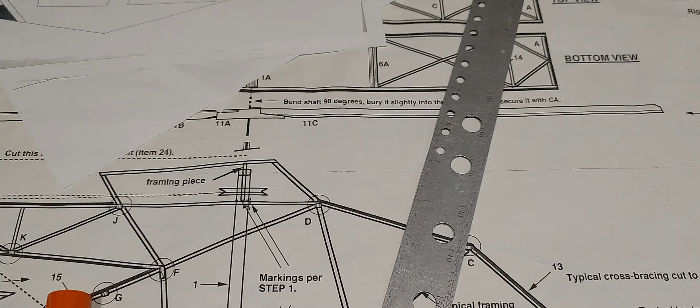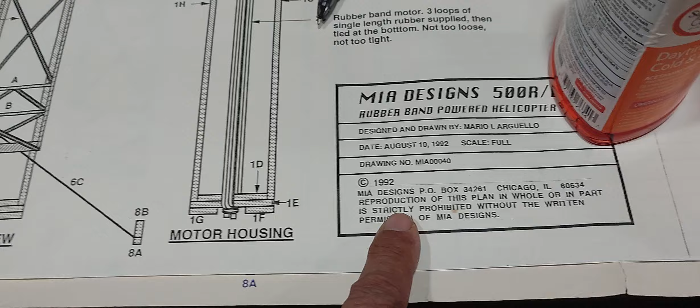This is Mario once again with MIA Microflight, and in this video I am going to be assembling the MIA 500 RB from the original plans that I produced back in 1992. These are the plans that I used to supply in kit form along with the instructions. You can see how big this plan is.

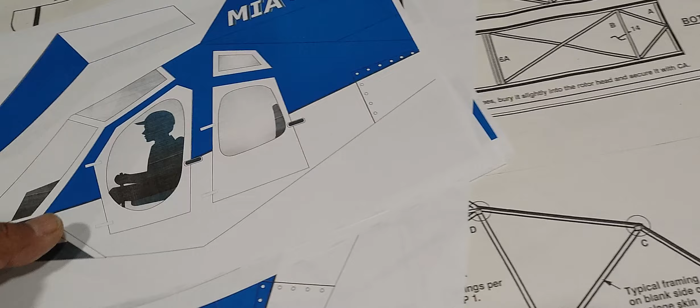So all the instructions, step-by-step instructions, the assembly of the motor, the assembly of the fuselage, balance and calibration, belt tension, blade tracking, flying, some safety guidelines as well. And so the whole purpose of this video is to showcase the assembly with some modern plans that I decided to do on the computer.

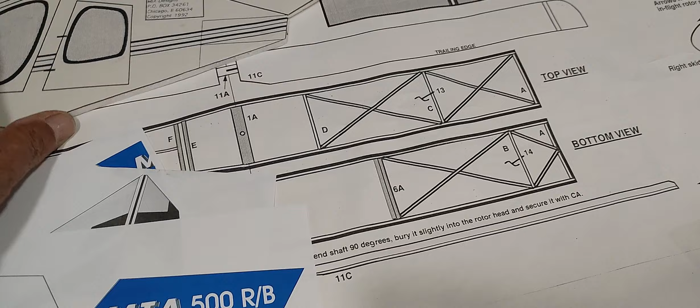I actually took my original design, which is this plan right here. You see the cutouts here from another sheet that I already cut out. These are actually done on a foam sheet, and I decided to bring that into more modern CAD than what I used back in 1992. And so that I can have it on the computer, so I can manipulate it, so I can create 3D printed parts, as well as some of these color printouts that you see here.

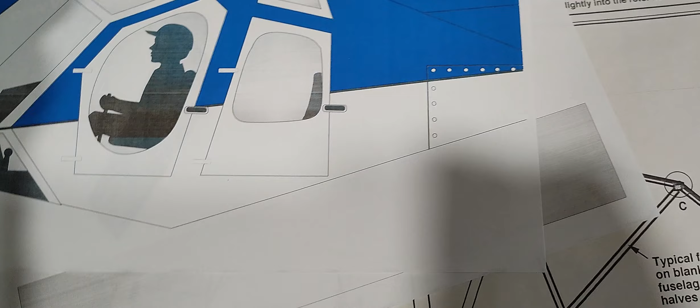And so this is slightly bigger than this model right here. This model is 19 inches from end to end right here, but I made this one to 20 inches exactly. So it's going to be slightly larger than this model right here, and it's got a little more details like the pilot figure, and the fact that this is printed in color is going to really bring this out.

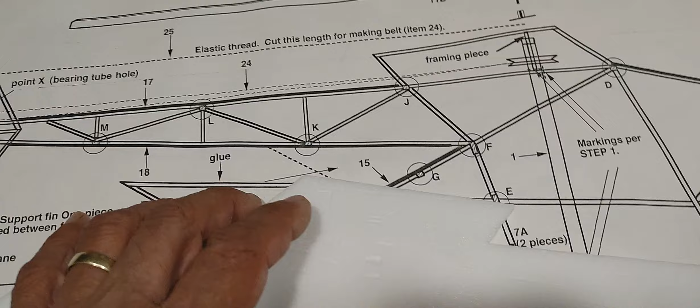Back in the day, you would cut out these profiles here, and then you had to build the framework that you see here directly on the plan, on the reverse side of that. Let me take this other one here so we don't confuse. I am working on some additional setups for that. You would build it directly on the back side of this, and that's how you would get basically all this frame here, which is 1/16 square balsa, part of these cutouts here.

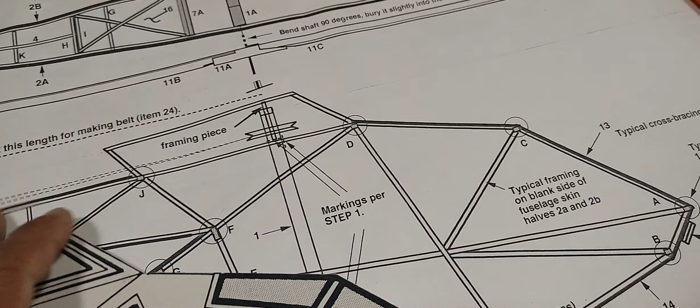Once that was built that way, you would assemble it, sandwich the motor in between these two pieces here, these fuselage sides, and then you would complete it with the top and the bottom sections. Once that was built, you would add the landing gear, which you can see here, and once that was done, you would work on the blades.

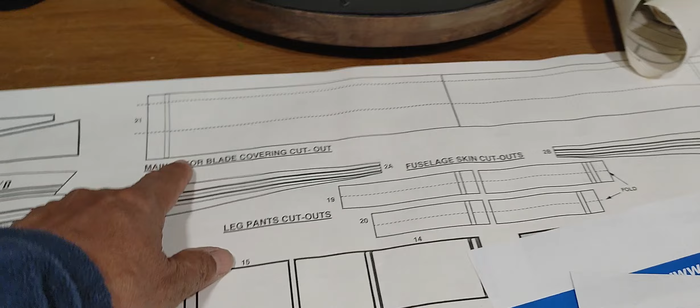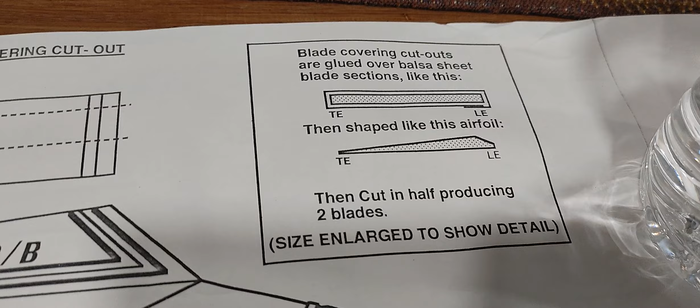I provided all the cutouts for the blades, so that you can also cover the blades in the same paper that the sheet is printed from. Just to make it easier, you would color these blade coverings to whatever color you liked, as well as the cutouts here, and then you would assemble the blade in that way. And once those blades were done, you would create the rotor assembly with the blades.

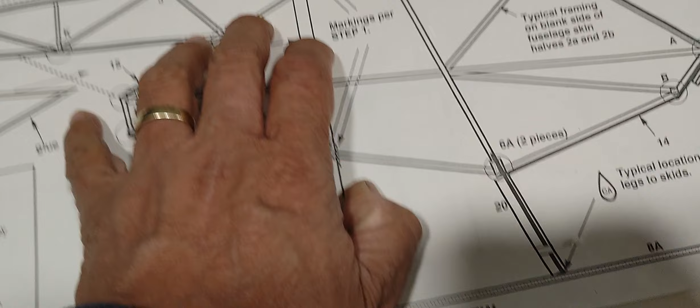Very simple, and as I said in many other videos that I've been showing lately on rubber powered helicopters, I've done very complex setups. I've done setups with the rubber band to extend the rubber band, and not only the torque but also the speed of the rotor. A little more complex setup than what I show here.

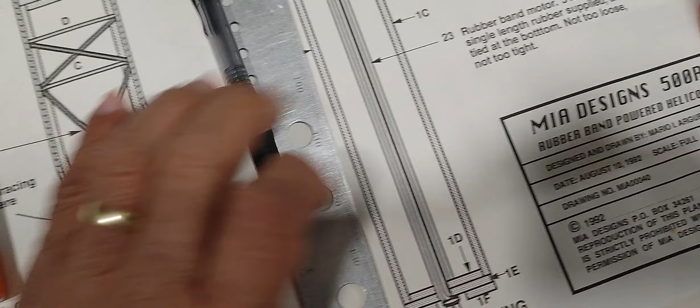This is simply just a frame for the motor mount. As you can see here, 3 loops of rubber plus a pulley, and that was basically the motor drive for the rotors. And the rotors are very simple. They don't have bell stabilizers, none of that stuff. The stabilizing was done on the blades. You'll see that when I get to those points of the build.

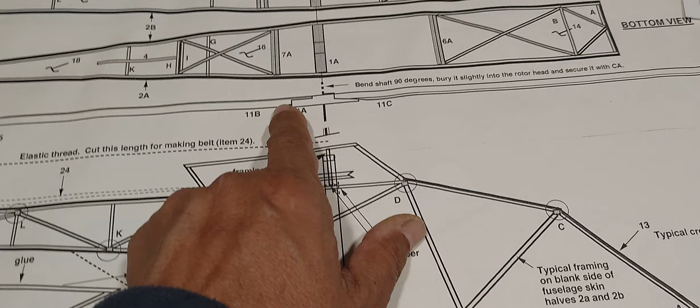This is going to be a new series of videos pertaining to this particular size of this model, using these printouts here. And once I get to that, you'll see how I made the blades and the stabilizer for the blades, to do away with the bell system, which is a little more complex and a lot more weight than necessary for this particular model. That is my trick, if you will, in maintaining a very lightweight model that flew pretty decent for what it is.

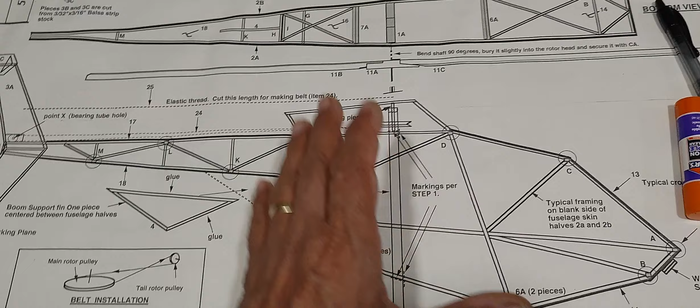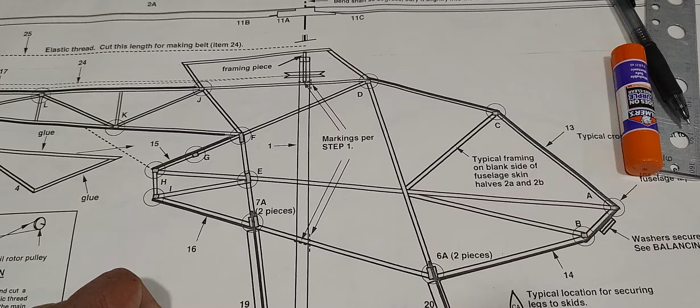This is a big rubber powered helicopter, and when I produced this, it was something totally new compared to the more conventional rubber powered helicopters that people were producing. Just a stick with a pulley and thread, very simple structures, which I've also done. And I've even modernized that in some of my recent videos. You'll see some of that.

The more simplistic and more freestyle helicopters, but this is a very spiffy helicopter, as you'll see as I continue with the videos in the build. A very spiffy model that is inspired by the Hughes 500. That's why I call this the MIA 500 RB, or rubber band power. So this is going to be the start of this new series of this particular size, and I just wanted to focus in on the plan. The size of the plan. I mean, it's a pretty big plan.

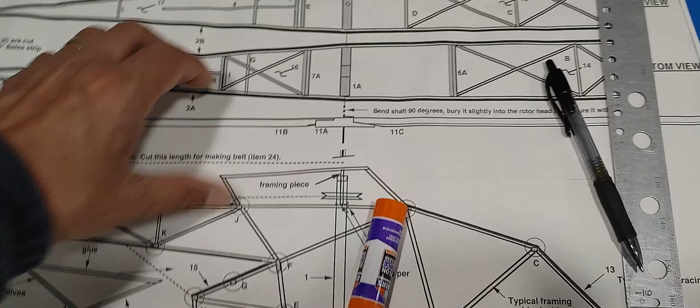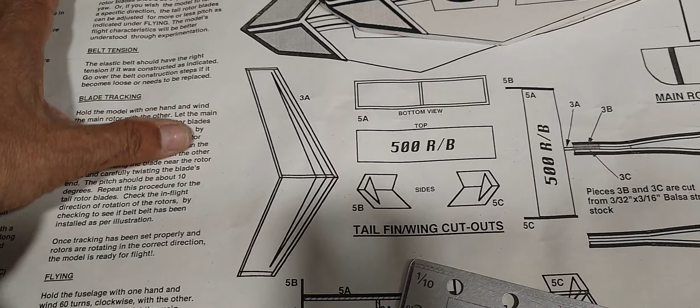I believe this plan is 24 inches, 2 feet by a little bit over 5.5 feet, because I used to include the instructions as part of the plan. You could cut that out and keep those separate, or you could cut these in sections to make it like a little booklet of instructions. And so that's how I supplied my plan, with the instructions all in one sheet, along with, of course, the balsa wood, all the components, to complete the model.

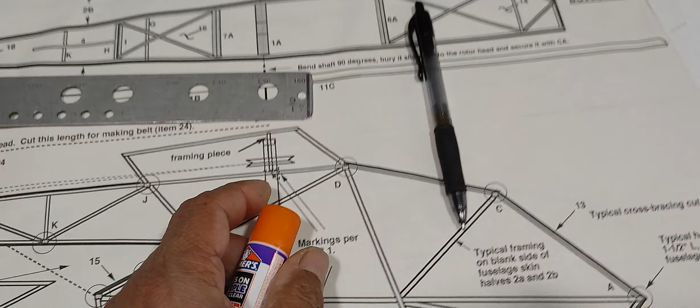And all you have to do is use some of this stuff here, the Elmer's glue or white glue, to attach the pieces after building the fuselage, and CA glue and accelerator spray is what I use to build this. I'm going to do it with this model here. So I'm about to assemble these pieces, because these are 8.5 by 11 printouts. As you can see, they're done so that they overlap. When I cut this, you'll see the fuselage, it'll be pretty much that size.

And this is how I also used to do a lot of the other models that I show in some other videos back in the day. This is going to be a good size model, but back in the day I used to build models from very small sizes on up to my largest one. I think it was like 3 feet in width. So we're talking about almost twice the size of this model that you're going to see here.